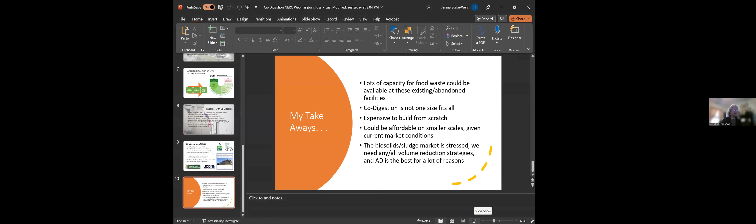So I want to thank everybody for being here today, and let's just dive in, and I'll introduce our first presenter. Janine Burke-Wells is the Executive Director with the Northeast Biosolids Residuals Association. Prior to NEBRA, she worked as a public servant for over 3 decades, 10 years with the U.S. Environmental Protection Agency, and over 20 years with local government, where she managed several wastewater systems in Rhode Island. Janine led the City of Warwick's Sewer Authority's response and recovery from the 2010 flood that wiped out the treatment facility and numerous pump stations. Janine has a degree in chemical engineering from the University of Rhode Island and a Master of Public Administration from Northeastern University. So please welcome Janine.

Thanks so much, Deborah. And yeah, thanks to NERC for hosting this. NEBRA is a NERC collaborator, and we have a few things we're hatching up right now. But we definitely have some common interests when it comes to organics and nutrient recycling. So I'm glad you're taking an interest in biosolids, which is a very unique organic waste that presents a lot more challenges in recycling, I would say. So I'm going to introduce the topic of co-digestion today, and then you're going to hear from some actual anaerobic digester, co-digestion operators.

So why are we talking about co-digestion? Well, it addresses 2 waste streams with 1 process, so that's a bonus. It absolutely reduces volumes. It increases energy or biogas production when you mix food waste with biosolids and sludges. By creating this energy and these sources of power, it improves the resiliency and self-sufficiency at water resource recovery facilities. Co-digestion is a perfect example of a circular water economy practice, and I'll say more on that in the next slide. It offers financial opportunities and benefits for the community.

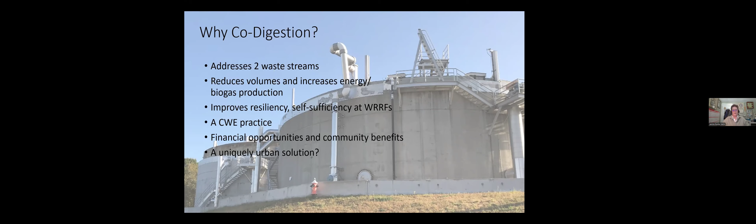I'm a big Water Environment Federation member, and I'll just share with you their definition for the circular water economy. And one of the biggest surprises to me when I started focusing just on the wastewater solids was how much resources there are to recover from the solids.

And if you think of this as a kind of water cycle, where if you don't put things in, you don't have to take them out at the end. So kind of thinking about products and things we use with the end in mind. That's what we're talking about when we talk about the circular water economy.

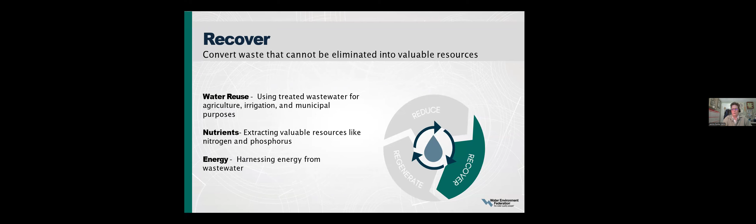So more on the recover piece here. These are the different aspects of recovering resources. So water reuse, some of these we're pretty familiar with. And I mentioned the nutrients, and now especially the energy recovery from sludges and biosolids is a huge component of the circular water economy.

And so this paper is kind of a policy paper, and it calls for a national biosolids innovation hub and a national resource recovery plan. So it kind of goes all together as far as biosolids or other organic residuals.

And in case you didn't realize, there's all kinds of things you can recover from biosolids. We're pretty good at removing struvite now, but other products from pyrolysis and gasification like biochar. There's products from arrested anaerobic digestion like biodegradable plastics. You can generate hydrogen gas. It's a very exciting time to be talking about recovering resources.

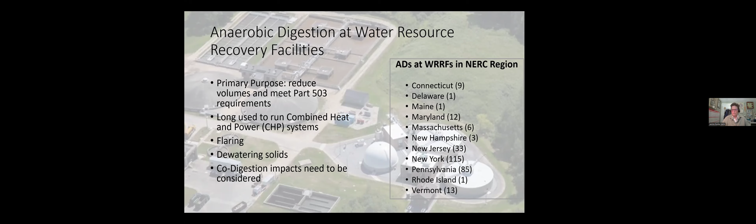So just quickly, where does this all fit as far as EPA's wasted food scale? It's kind of hanging in the middle of the P trap there, but certainly after you prevent and then donate or use it in some other way, anaerobically digesting and composting it is a good thing to do.

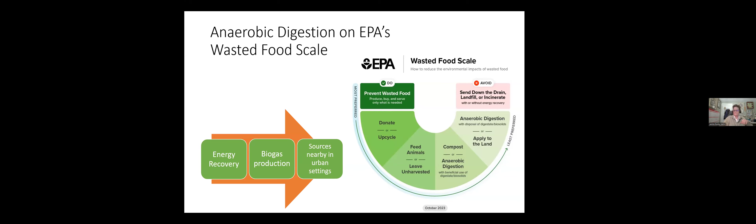All right, so some of the questions I came up with, and maybe Jane and Andrew will answer some of these, but some of the issues are making sure that these units are in the right place for the right purpose and minimizing impacts on the public. I'm pretty sure that the traffic is the reason why the Massachusetts Water Resources Authority doesn't do co-digestion. That's their famous egg digester in the background there.

What to do as far as accepting waste? You have them shipped in. Do you process them on site? What do you take? This is probably the most critical piece of it, is the feedstock quality and quantity. And then, not a bad problem to have, but what do you do with that additional energy that you're creating?

And then, of course, for us, the biggest question is always what happens with the remaining solids. You know, the end uses, the capacity for managing those remaining solids is diminishing every day. So knowing where those are going before you start is really going to be the key.

Just a few things of interest from NEBRA. We run the Northeast Digestion Roundtable. It's free. It's an open quarterly roundtable to talk about operating issues with specifically co-digestion lately. So that's open to all. We also manage the biosolids emissions assessment model, which is looking at co-digestion as far as greenhouse gas impacts. And that's where we're finding the leakage to be a topic of discussion.

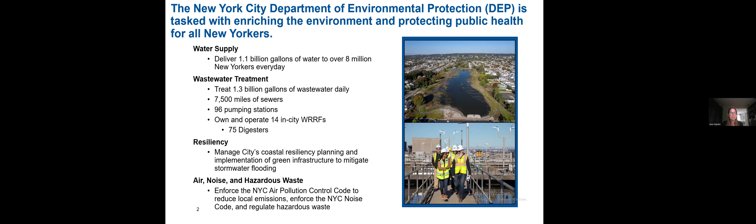We also do resiliency. We manage the city's coastal resiliency planning and implementation of green infrastructure to mitigate stormwater flooding. And we're also responsible for air, noise, and hazardous waste. DEP is really committed to deep decarbonization and a circular economy. We've been working on deep decarbonization since 2007 when the first PlaNYC came out.

And through a combination of mayoral directives, executive orders, the Climate Mobilization Act of 2019, and DEP's own strategic planning goals, we have been tasked with achieving carbon neutrality by 2050 with interim milestones of a 40% reduction by 2025 and a 50% reduction by 2030. Achieving energy neutrality at our water resource recovery facilities by 2050, achieving zero biosolids to landfill by 2030, and also achieving a circular economy.

So I just want to tell you a little bit about Newtown Creek. This is the largest of our 14 in-city water resource recovery facilities. It's a 310 million gallon per day treatment facility. It's sited on 54 acres in Greenpoint, Brooklyn, and it has 8 egg-shaped digesters, each one able to hold about 3 million gallons. So we have about 24 million gallons of digester capacity at this particular facility.

And we have a lot of spare capacity. The target residence time in a digester is typically 15 to 20 days. Our retention times are typically 35 to 40 days in this digester, so we actually have plenty of room to take in other feedstocks.

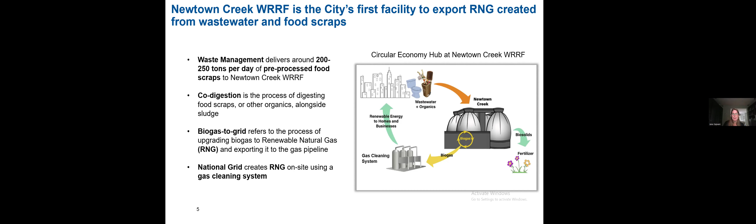And then the source separated organics are brought to a transfer station that Waste Management operates about a mile from the Newtown Creek facility, and they pre-process it. They pick out all of the contamination. It goes through a 5-step process where it gets cleaned and it gets turned into a slurry. I had a colleague who would refer to it as a smoothie, probably the most disgusting smoothie you can possibly imagine. It's very smelly, but it has that kind of consistency.

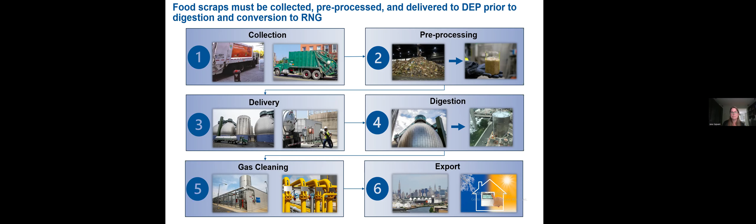We've gotten actually a lot of attention about our food waste system. Like I said, we take about 200 to 250 tons a day. And I think some people think that this is actually the bulk of what's in our digesters, but really it's only about 10% of the feed that we're putting into our digesters. Newtown Creek is a very large facility, and so we have a lot of wastewater sludges that are being digested every day. And so adding this in does add to the production of the biogas, but it really is just a part of the feedstocks.

And I will say that one of the positive things that we find about this is that, if there's any kind of variation in the food waste that we're receiving, or if there's any reason why we need to ramp it down or ramp it up, the wastewater sludges that we receive every day and we're digesting every day really provide great buffering capacity. So it's easier for us to ramp up and ramp down.

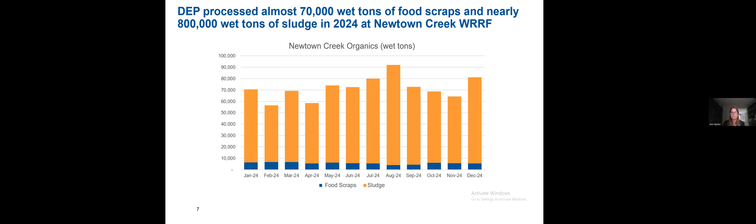So why are we doing all of this? So just for some context, co-digestion, we believe, plays a pivotal role in managing New York City's source-separated organics. We have a lot of digesters within the city. We have a good amount of spare capacity, and as a city, we produce a lot of food waste, right? So it's estimated that about 4,100 metric tons per day of organic waste is generated.

About 1/3 of New York City's municipal solid waste stream is organic. And so that includes food scraps, yard debris, and restaurant grease. So there's a lot of material that needs to be handled. New York City has recently rolled out the largest curbside organics collection program in the nation. So every single New York City resident has access to free curbside organics collection, which is really exciting.

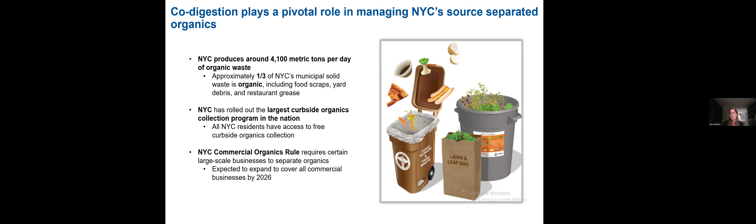And then also New York City commercial organics rules require certain large-scale businesses to separate organics, and that's been a pretty successful program. And then it's expected that the Department of Sanitation will expand that to cover all commercial businesses by 2026, which is very soon. So there's a lot of material to be collected, and as the program matures, we anticipate that more and more will be collected.

And we're finding that it digests really well. Like I said, we've been doing this since 2016. And initially we were a little bit nervous about it. We're wastewater people. We treat wastewater sludges, and anaerobic digestion is something that we've been doing for a really, really long time. Decades. As Janine covered, it's a really important aspect of large scale centralized wastewater treatment. And we were a little bit nervous: if we're going to add this other feedstock to it, is it going to turn the digester sour?

The digesters in Newtown Creek are very large. We wouldn't want to have 24 million gallons of sour digestate on our hands. And so we were very, very cautious with it initially, but we were really surprised, this stuff digests really, really well alongside our wastewater sludges. And it took us a while to really think it through. And there's some things to consider in this: food waste is majority water, right? And so this is just part of the water treatment process for the water that's in the food waste itself.

And then also, one of the things that we were really impressed with initially is that the food waste digests really well at the same temperatures and the same residence times as our wastewater sludges. And it took us a little while to put together that the material that we're receiving as food waste is pretty much the same material that we're receiving as wastewater sludges. They're both food waste, right? The food waste that we're receiving through the wastewater stream has been digested through people the first time. And so what we have is two streams of the same material, except one has been digested the first time around and the other one has not.

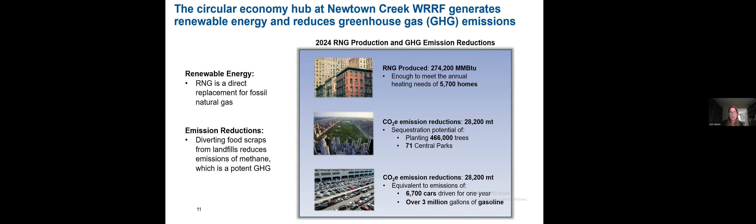Northern Tilth did a study in 2023 where they looked at the carbon footprint of anaerobic digestion and compared it to other food waste endpoints, essentially comparing it to compost, but also looking at different iterations of anaerobic digestion, and found that they were all carbon negative, and that anaerobic digestion, when partnered with beneficial use of the digestate, is really comparable to composting.

And even if you were to landfill the digestate, it's still net carbon negative, or close to net carbon neutral. And all of this is in stark contrast to if we continue to just send it to landfills, which is definitely net carbon positive.

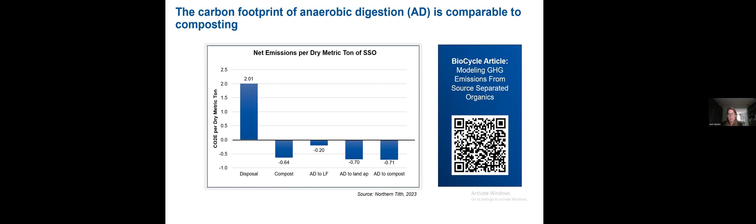But we want to make sure that everything that we're doing here really is mitigating climate change. And so we've committed extensive resources to mitigating any fugitive methane emissions that might be occurring at our 75 anaerobic digesters. We conducted field studies across 14 in-city wastewater resource recovery facilities, looking for fugitive methane, and we did identify some leaks. Many of the identified deficiencies were quickly resolved by the facility. Some of it was like, oh, we just need to tighten this, or we might need a new gasket; things that were actually pretty easy to mitigate.

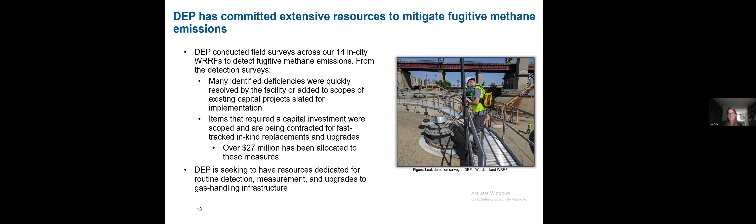And where we have ongoing construction projects, we were also able to add some of the scope of work into capital projects that were slated for implementation so that we could get it done quickly. And for the remaining items, New York City is investing about $27 million toward fast-tracking contracts to replace lengths of pipelines and other places where we're finding leaks, to make sure that we're able to mitigate as much methane as possible. And we're also seeking to have resources dedicated so that we can do this type of routine detection, measurement, and resulting upgrades to the gas handling infrastructure to make sure that we really are achieving the greater environmental good.

Just wanted to touch base on it a little. So New York City generates about 4,100 tons a day of food waste. We're processing about 200 to 250 tons a day. I think a little bit more than that is currently being composted. And we really do see co-digestion as an important solution for New York City, but it's part of the toolbox. And we think that co-digestion and composting can definitely be complementary. So just things to consider between co-digestion and composting: co-digestion is able to take a different range of organics that are collected, in addition to food scraps.

We can also take meat and dairy. We can take fats, oils, and grease. Composting is, again, great for its food scraps and also for yard debris. Although we can take yard debris, it doesn't digest quite as well, and so we prefer that to be routed to composting when possible.

The ability to address levels of physical contamination in the source separated organics in New York City's collection is uneven, right? The drop-offs that we receive from the farmers markets tend to be really pristine source separated organics. We have other source separated organic streams where the contamination can be over 20%, 30%.

The wet process to pre-process the food waste to go to co-digestion is really, really effective at cleaning out that physical contamination. From what I've heard, that can be more challenging for composting, but I do know that large scale facilities do have the ability to do it. With the process that we have, we've measured the inerts after the pre-processing step, and we find it very effective.

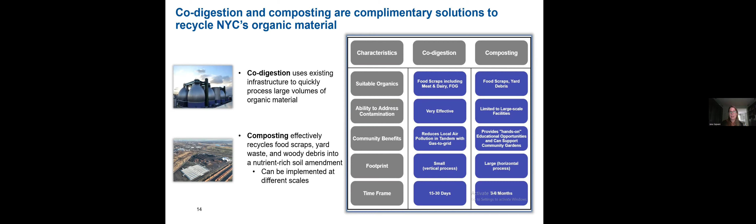Just a little note about renewable natural gas. The work that we've done trying to figure out what is the highest and best use of our biogas for New York City has pointed to directing the renewable natural gas to the hardest to electrify users as the most sustainable way for us to have our biogas used. And just for context, there sometimes is some concern that we're perpetuating fossil fuel usage, and it really isn't the case.

If we were to take all of the city's food waste and digest that, and take all of our wastewater biogas and export all of that to the grid, we might be able to offset like 2% of natural gas usage. We are not perpetuating.

Everybody who can electrify their heating needs will need to, but there are a small number of niche users for whom it's going to be really, really hard to get off of fossil fuels. They need higher temperatures. There's just no room to be able to get off the Con Ed steam system. There are these niche users within New York City that our RNG can be directed toward, because they're going to be the very last users of fossil fuel in the city.

It has a negative carbon footprint. Not all of them are the same, but you can see from Argonne National Labs, the RNG that comes from sludge and from food waste are both considered net carbon negative. And again, very much in stark contrast to fossil natural gas.

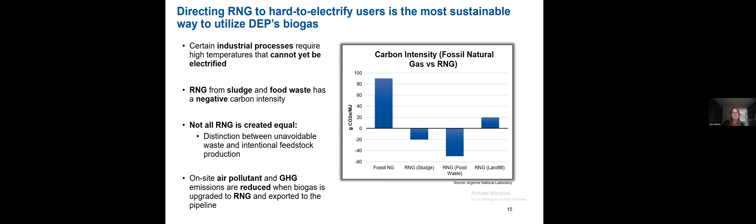So just some key takeaways. We believe that a local outlet capable of managing large volumes of material can help ensure the success of New York City's residential and commercial organics collection program.

We are hard pressed to find local composting sites that would be able to handle the volumes that New York City presents. And we're able to handle a tremendous amount of material within existing infrastructure, leveraging decades and decades of experience from our wastewater treatment operators.

The resulting digestate can also be used for beneficial use, since we are still recovering the nutrients. Like Janine had said, we think that co-digestion is especially well suited for urban areas. Many wastewater utilities already operate anaerobic digesters.

Urban areas generate significant volumes of food scraps and fats, oils, and grease. And this pre-processing equipment can effectively handle high levels of physical contamination. And then just lastly, like I had mentioned, the renewable natural gas production from waste-derived feedstocks can complement electrification efforts in order to achieve decarbonization goals.

It should be similar to how co-digestion can be part of the toolbox. It includes lots of composting. We think that RNG can be used as part of the toolbox, along with a lot of electrification, for a city to decarbonize its heating needs.

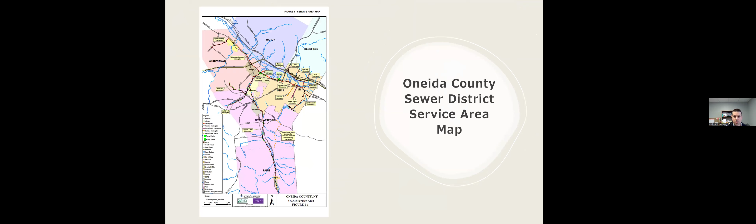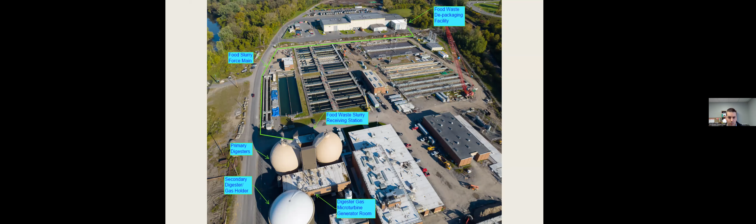All right, food to energy. That was the name of our program that we came up with. We process the food, we send it to Oneida County Sewer District, and they create energy with it. Our facility is called the Source Separated Organics Processing Facility. The acronym is SSOPF. You'll see that appear in the upcoming slides here.

So we originally did a feasibility study back in 2017 to see how much organic waste that Oneida and Herkimer counties could provide to our facility, based on the ranges of weekly tonnage, because at the time DEC was exploring 2 tons per week, and then they've been ratcheting it down to 1.5 tons now, and then I believe in 2027 it's going to be down to 1 ton per week that they need to recycle their organic waste. We began processing in June of 2019. We built the facility in 2018.

And currently we receive SSO from local grocery stores, colleges, food banks, and dairy manufacturing, and some residents do bring our materials. You can see on the right, that is all prepackaged food. We take prepackaged food, and we also take loose grocery store waste. To date this year, we've had some equipment updates and upgrades in the beginning of the year, so we weren't operating for the first couple of months, but we've processed just under 6,000 tons of SSO this year. Our annual tonnage has grown anywhere between 500 to 800 tons per year since 2020.

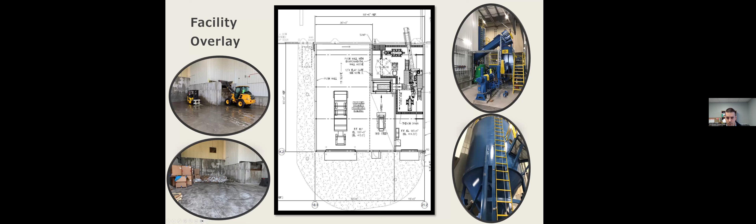All right, so we bought this equipment through Scott Equipment. They're located in Minnesota, and at the time, which was 2018, their biggest and baddest machinery was this Thor, and that has been, I think, overall a very good piece of equipment for us.

Inside this, you can see there's doors to contain everything, but there is a shaft that weighs approximately 10,000 pounds, and it has between 50 and 60 swing hammers inside of that. These hammers each weigh about 65 to 70 pounds each, and when we fire this machine up, they all swing, and that is how the process of depackaging the material comes through.

On the bottom portion of this Thor, there are various size screens, and that is how all the food waste is pushed through. I'm sure everybody's familiar with a Play-Doh machine where you put the Play-Doh in and you push it through and it comes out in different shapes. That's basically what we have on the bottom. Then in the bottom left photo, that is just the trough where the food falls into before it gets pumped into the mixing tank.

Here's another close-up photo of our processing on the right. Like I said, we've done some upgrades to our equipment here. So for instance, this pump we've upgraded over time. There's another pump in the back that we've upgraded as well. It's kind of been an ongoing process for us at our facility.

And the bottom middle picture is just our loadout. Inside there, we have a pump, and that is where the force main goes from our facility over to next door to the digesters.

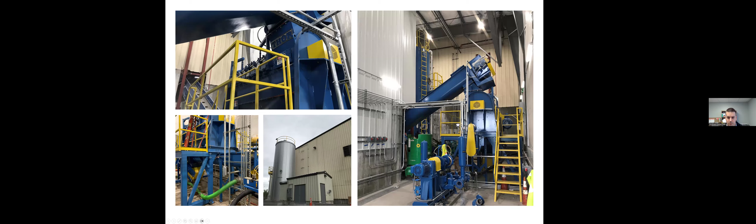All right, we utilize a batching process. Like I said, we put it into the mixing tank, and then from there, we're looking for a certain percentage of solids. Everything we've tested to this point has been under 10%, and that's what the Oneida County Sewer District requires for us to put into their digesters. Like I said, we have about 1,500 feet of underground pipeline. This year we've averaged 22,000 gallons sent to the digesters.

In order to help promote more SSO being brought to our facility, we have a decreased tipping fee. Our normal municipal solid waste is $60 per ton, and we offer a $20 reduction per ton at $40 a ton for potential customers to drop off at our place. Currently, we have 15 haulers to provide SSO to our feedstock. We have regular customers that come in at least 1, 2, 3 times a week. And then we also have ones that come in every other week or once a month based on what their needs are.

Another picture here in the bottom right, that is the loose grocery store waste we receive. One of our haulers brings in food waste from Hannaford. If you're familiar with the Northeast, that is a grocery store in our area. So you can see various items in there. There's produce, there's bakery items. We even get deli meats in there as well.

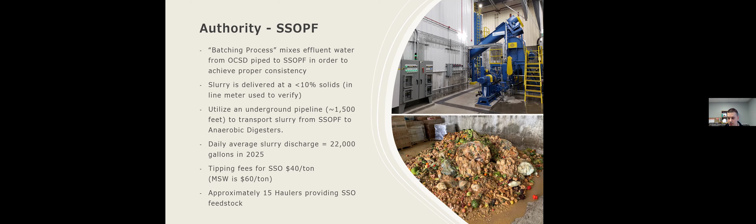All right, a little overview of what was going on with the Oneida County Sewer District. The original facility was 1972 and has a design influent flow of 54 megagallons with a peak wet weather capacity of 111 megagallons. The digesters were part of a massive upgrade project to their facility in 2016. And that is when we started doing our feasibility studies. We knew New York State, the DEC, was coming down with food waste regulations, and we said, hey, this is probably a good time to take advantage of our next door neighbors putting in the digesters.

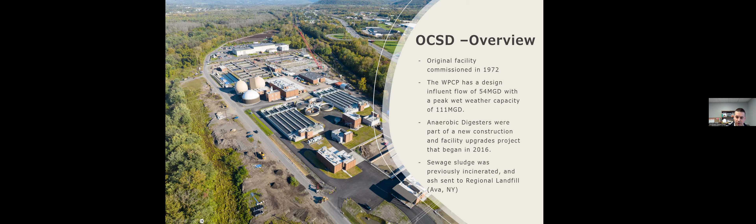Previously, sewage sludge was incinerated, and then the ash was sent up to the landfill. Now they currently are using generators to use that gas. In 2007, they entered an order of consent to eliminate sanitary sewer overflows at the Sauquoit Creek Pump Station, which has led to the major upgrades to their project. So this has been going all the way back to 2007. The air quality regulations had changed at that time, and the facility was in drastic need of upgrades, which seems to be a pattern for most of the wastewater treatment plants up in our area.

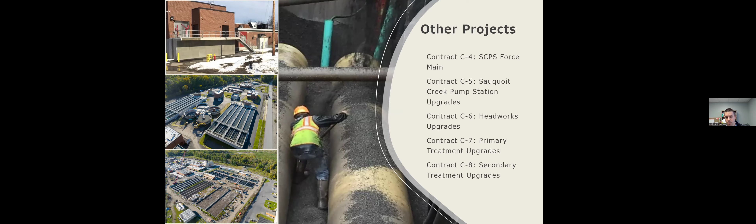They had several contracts that were associated with that project. Like I said, this construction spanned over about 8 years. They started in 2017, and they just finished up the last portion of their projects last year. This included new anaerobic digesters, which we've been going over, energy recovery, as they do have several engines, power production right now for up to 50%. That was the original design, with designs to increase that with more generators.

Additional heat recovery, which is used for the anaerobic digesters. They decommissioned all of their incinerators. They're no longer burning any of the sludge. Septic receiving facilities for outside waste, including food waste for our authority. So that building right in the middle of your screen is where our material goes to. And then they had miscellaneous upgrades throughout their facility.

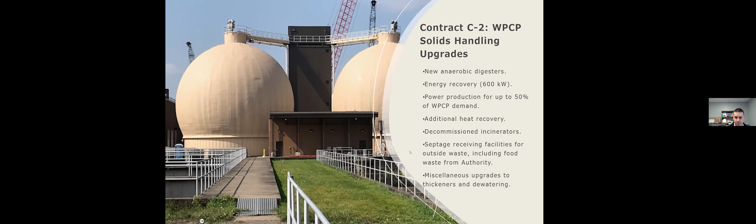They utilize a FOG screening machine to screen incoming slurry from the SSO PF. That's just in case anything slips through our system. The FOG screens they have are 5 millimeters wide. The screens that we utilize can only break down that material to about 3/8 of an inch.

Sewage sludge is continually fed into the ADs, while the SSO is kept in a 50,000 gallon storage tank underground underneath that building, and that's where we directly pump into before it gets bled into the anaerobic digesters. The SSO provides a high chemical oxygen demand and volatile solids, which the bacteria in the digesters break down and turn into methane gas.

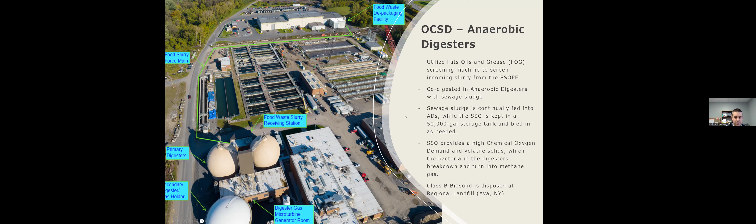And then with that methane gas, currently SSO that we provide, just from our facility, accounts for 18% of the AD feedstock, but is also responsible for just under a third of their methane gas production. That's been increasing since we've been taking in more SSO material. We've been able to get that up. So we're always hoping that we have more SSO coming in so they can increase those capacities.

The digester gas that we talked about is used to produce electricity for their building. Originally, part of their program was to only cover 50% of their power needs. But since adding 2 more micro turbines, they're up to about 75% of that wastewater facility's energy demand covered with their generators. All the energy produced is internally used on site. And the exhaust heat from those generators is used to maintain the digesters' temperature.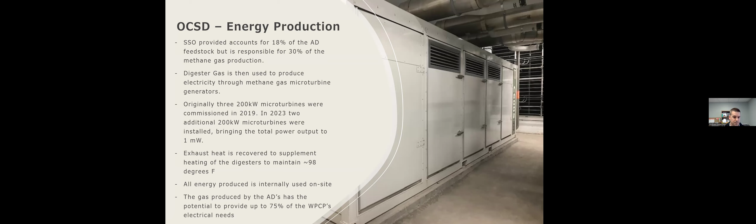Andrew, thank you so much. Stay with me for a moment, because before we go to the questions for all the presenters, one question for you, Andrew: what percent is non-organic material from the depackaging? You've got your food slurry and you have your packaging waste. I have to double check the newest numbers, but I think we're between 10 and possibly 20%. I think it's closer to that 10% though.

Those depackaging machines are extremely efficient in removing that residue. And certain residues, say for instance we get a load of aluminum cans, we can separate that out and collect that. Sometimes it does get a little messy with those packaged items because you're mixing plastic, cardboard, film plastic too, not container plastic, and it's hard to get some of that stuff out of there.

Okay. Wow. So we do have some questions from the audience, and then I have some questions too. We have good time remaining, so let's respond to questions from attendees. I'm going to start with the heavy one, because several people have asked the big question about PFAS. So what happens to PFAS that's present in sludge, and then when you co-digest with food waste, what happens with managing that material? Who would like to start?